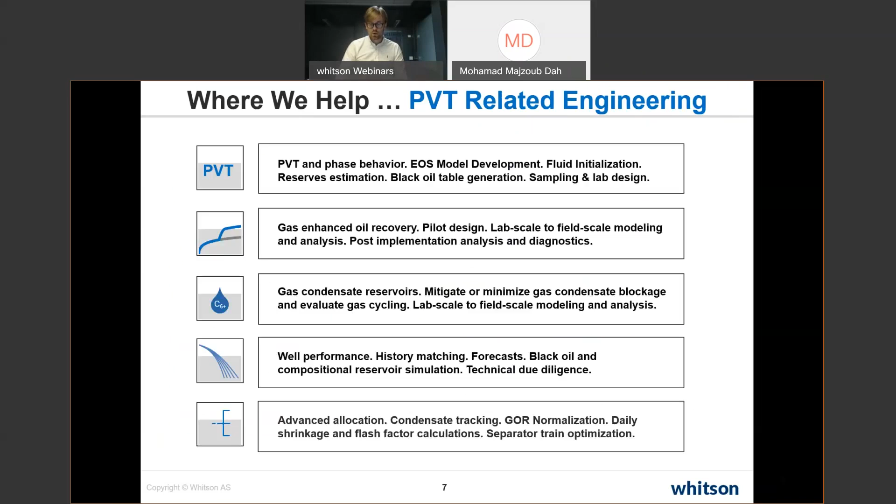So very quick on Whitson. We've been around for more than 30 years, focusing on helping the global oil and gas industry, everybody from independents to super majors and NOCs, with PVT-related engineering. That's consulting, software, and databases, which is a little bit relevant for what we're going to talk about today. PVT-related engineering is essentially everything that has to do with PVT: PVT model development, laboratory follow-up, gas-enhanced oil recovery, gas condensate reservoirs, well performance, advanced allocation, and everything in between. We typically say that everything we work with has a significant compositional sensitive component to it.

When it comes to tight unconventionals specifically, we've been working on most of the largest basins in North America, where Duvernay is the newest one under our belt, which we finished probably a month ago, and is also the main objective of this call. We've done similar studies in Eagle Ford with multiple companies, Permian with 14 different companies, SCOOP/STACK, Bakken, and also the Montney the last few years. That's been very successful.

What we try to solve in this study is that we as engineers, geologists, petrophysicists, or marketing or sales people have a lot of PVT-related questions that we need to answer on a day-to-day basis. Sometimes PVT is the only thing that matters; sometimes PVT properties are one of several things that matter to a decision or to creating value. For example, we need black oil tables for every single well throughout our acreage. How can we get that? Or black oil PVT properties, formation volume factors, or solution GORs to calculate reserves. Bubble points and dew points have been in the media a lot the last few years. How do they vary across the field?

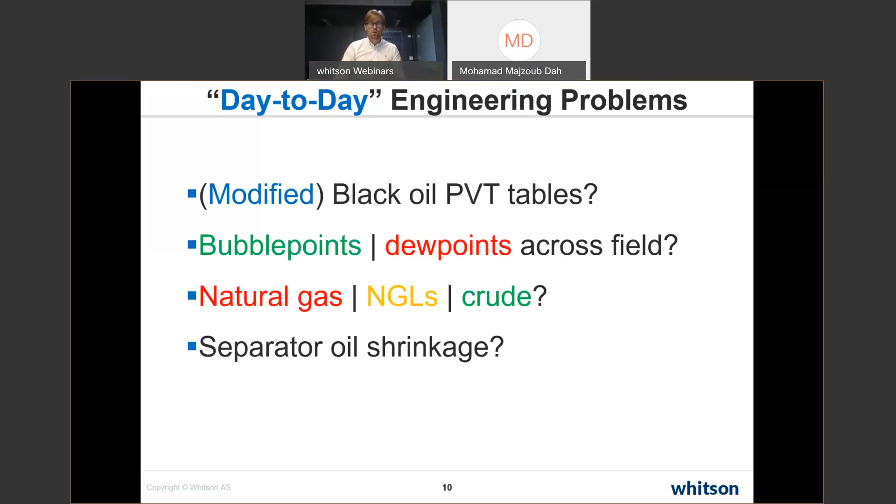When you're producing oil and gas, you're actually selling natural gas, NGLs, and crude. So how can you convert the forecasts you provide in terms of oil and gas rates into the actual products that you sell? How can you quantify separator oil shrinkage, or estimate how much uplift you'll get from gas EOR, in this case huff and puff? These are just a few of many questions where the product of this multi-client study is the workhorse that will help you answer them, and we'll get back to that later.

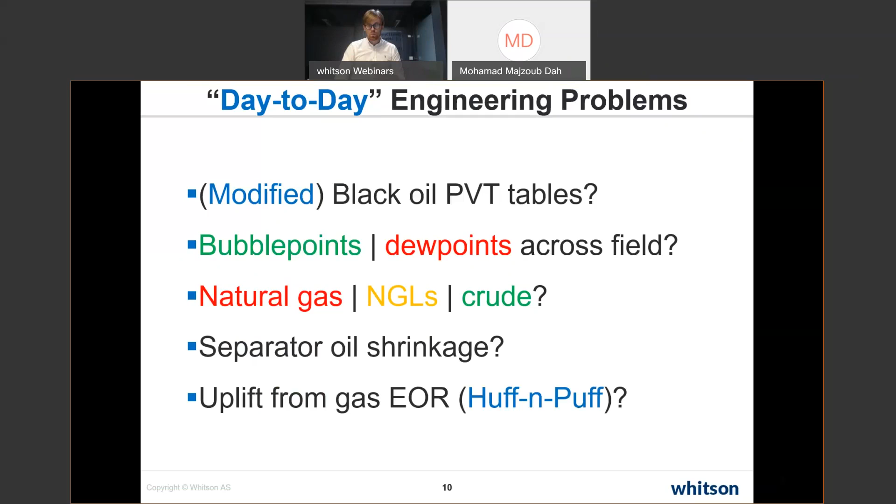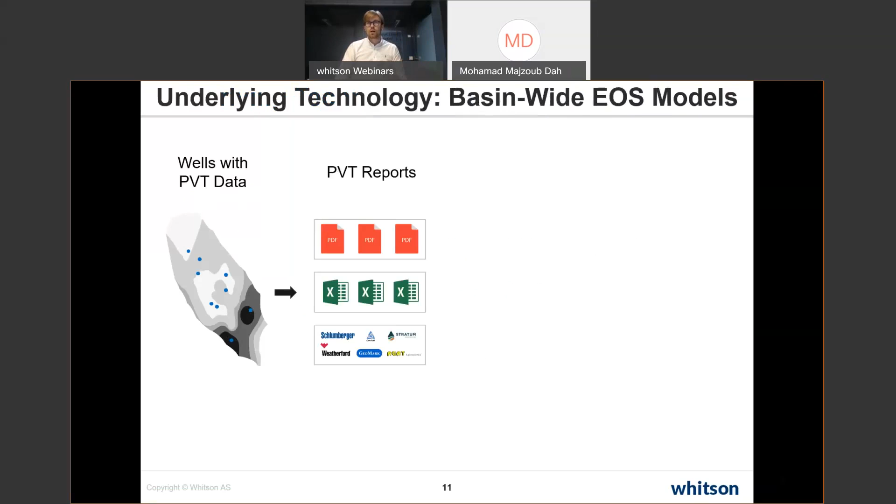The way we've conducted this study has been to gather all the wells we found in the public domain in the Duvernay, which is 23 different PVT samples from the different laboratories that have conducted these studies: Weatherford, now called Stratum, Core Labs, and one more company, I think. Then we've used all that data to create one field-wide equation of state model, and we'll talk about what that really is and what it can be used for. The key point is that we can use this one model for all the wells across our basin, and we'll explain the details of that in a minute.

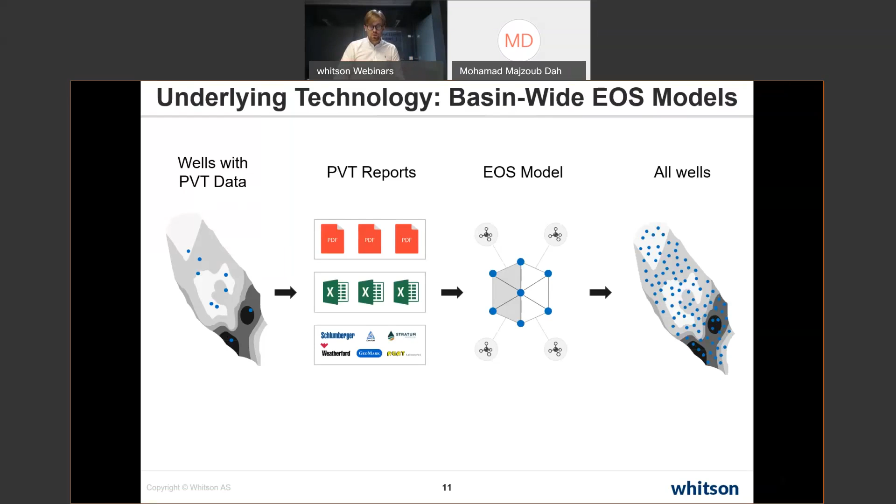The alternative to this, and there are alternatives to having a field-wide equation of state, but here's essentially a couple of the key things that are typically flawed with them. So the first thing would be just regular PVT correlations, for instance, the Standing correlation or the Glaso correlation or something similar to that. However, technically, they're only yielding reasonable results for solution GORs less than 1,000 scf per barrel.

And especially when we talk about these unconventional systems, probably if we just exclude the Bakken, they span a wide range of fluids. They span what's called the critical transition, so both near critical gas condensates, near critical volatile oils, and gas condensates, where a lot of these correlations fall short in their predictive capabilities.

Another opportunity would be just to create a so-called regular equation of state, which typically is just tuned to one sample or very few samples in a particular basin. And what you typically see there is that they're not capturing the field-wide characteristics, which is, as we'll talk about a little bit later, the relative paraffinicity or aromaticity of that particular field.

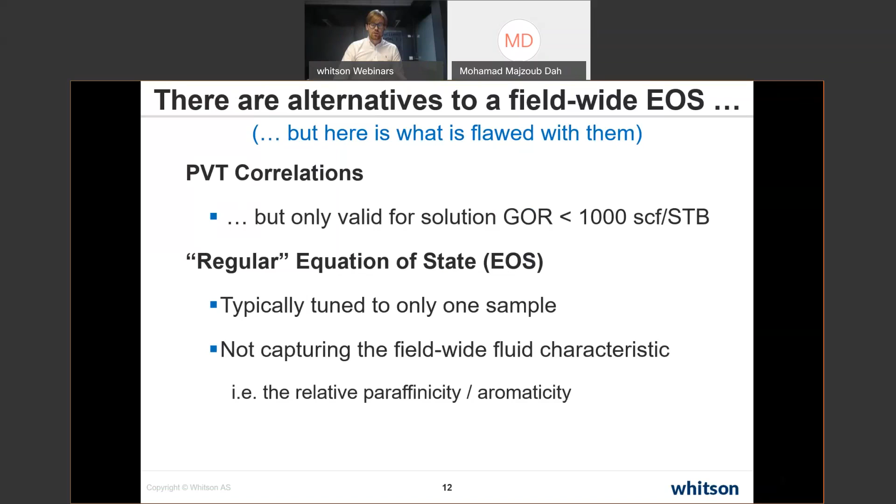And that's really, really important, and essentially what we will also show later for this particular basin and a lot of the other basins as well, where a lot of these fluid systems, especially in unconventionals, have a very, very consistent trend when it comes to this so-called relative paraffinicity or aromaticity.

But before we go into that, the first thing is to answer, okay, a field-wide equation of state model, what is it really? In short, it's a model that requires 3 input parameters, so pressure and temperature that we know very well from day-to-day work, being in the kitchen. You know that water boils at 100 degrees C. You know that you might have a pressure cooker in the kitchen as well.

And with those 2 inputs and this thing that we probably don't have that much of a hands-on relationship to, which is the composition, which is just what differentiates a dry gas from a black oil to a gas condensate. With these 3 inputs, you can then predict the phase and volumetric behavior for a particular fluid. Okay, and so the equation of state for the entire field is kept constant, while what is changing is the temperatures and pressures and the composition from one area to another.

And just to take an example, a dry gas would have much more methane content and no C7 plus content, while a black oil, for instance, would have a much lower, on a relative basis, C1 content and more than 25 mole percent C7 plus, for instance.

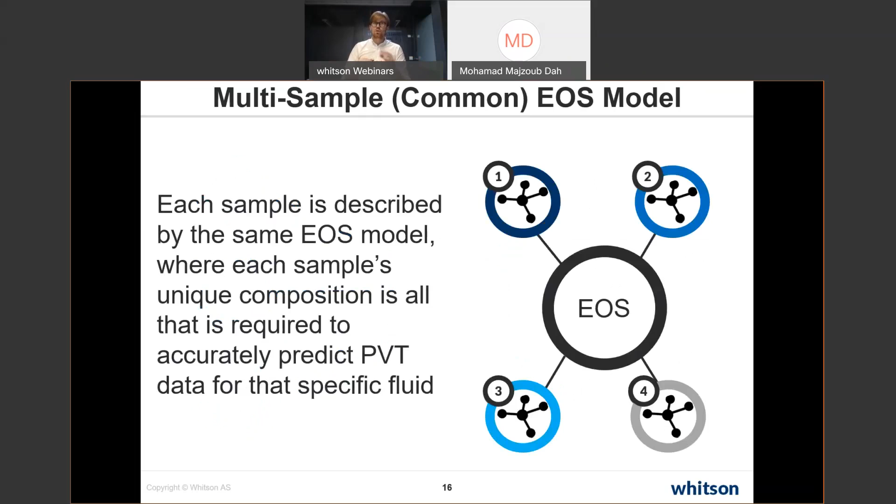And that's what we call a multi-sample or a common or a so-called field-wide equation of state, where several compositions are used in the same model, and the results for a black oil, a near critical gas condensate, and a volatile oil, as you see to the right here, are predicted with only one model. And the strict definition of this is that each sample is described by the same equation of state, where each sample's unique composition is all that's required to accurately predict PVT data for that specific fluid.

And then the question is, what is actually different from one basin to another? And that's essentially what I talked about in the introduction, this relative paraffinicity and aromaticity. And what does that really mean? That means how we actually characterize these heavier components, typically heavier than C7 plus, because they are, for practical purposes, just averages actually of all the isomers that exist

And to make this a little bit less abstract and a little bit more concrete, if I asked you, send me an equation of state model, then you would typically send me a file or an Excel sheet or something similar where you have two tables, one being the so-called component properties, and the second being the so-called binary interaction parameters. And they are representing two of the industry standard equations, which are typically Peng-Robinson and SRK, so-called cubic equations of state, that you can use in any of the industry standard commercial tools as of today.

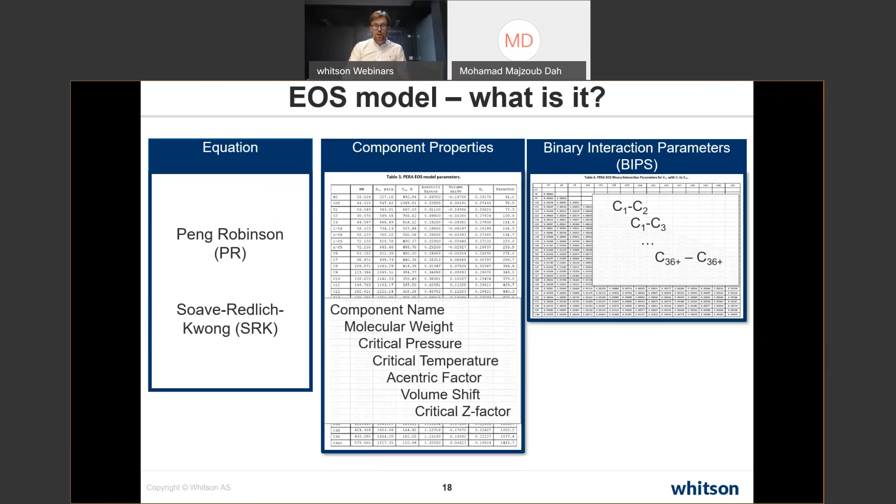And yet again, this equation of state is the cornerstone to so many different engineering applications. And sometimes you are not using the equation of state directly, but you're using derivatives of the equation of state, for instance, black oil tables. And most black oil tables today that you use commercially are actually generated from an equation of state, but what you're using as a direct input in the simulation is a black oil table that's kind of like a child or a derived product of that model, which will be specific from one composition to another.

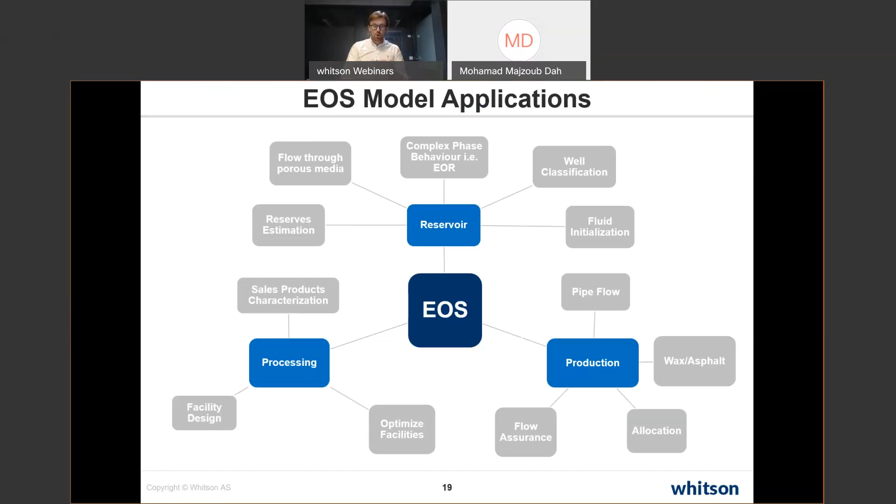So jumping back into the Duvernay fieldwide EOS study, which is what this call is about, we have made a so-called fieldwide PVT model that everybody that participates in the project gets immediate access to. And that's tuned to 23 different PVT reports, so a considerable amount of data, all the data that we found in the public domain.

The raw data itself we share as a part of the JIP, so you get the data, you get the equation of state, and since the work is already done, you get the results immediately, which means that essentially you could start to use these things tomorrow, in theory.

The available data that we have is 10 reservoir oils and 13 reservoir gases. So we have 10 bubble point samples and 13 dew point samples. And this is the experimental overview, where we have 23 CCE tests, 13 CVD tests, 10 DLE tests, 9 multi-stage tests, and also a lot of reservoir oil viscosities.

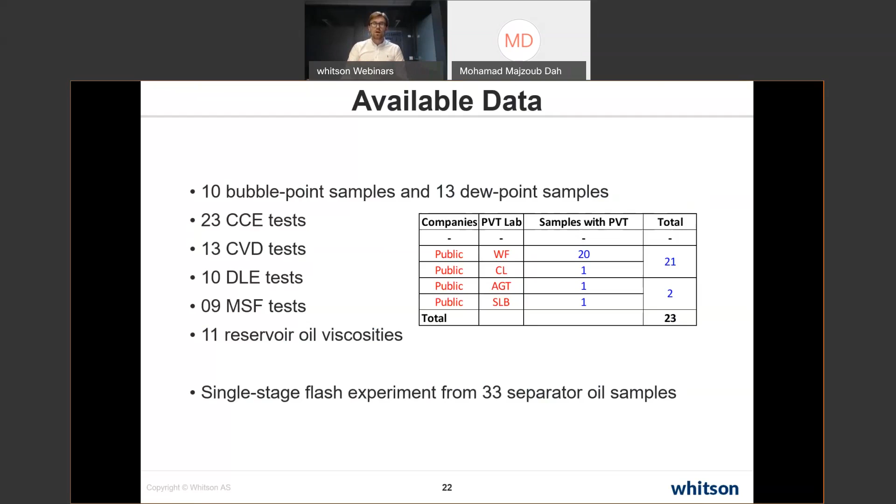For those of you who are in the domain, it's very rare to actually have measured reservoir oil viscosities. Most of the samples are from Weatherford. There is also one from Core Lab, one from AGAT, and one from Schlumberger. And in addition, there are around 33 single-stage flash experiments conducted on 33 separator oils, which is a key point in, for instance, estimating flash factors and shrinkage factors for individual wells and how they change throughout time.

The most important thing, and I iterate that over and over again, when you're developing a field-wide equation of state is to actually have a wide range of different fluid samples. And we can definitely see that in this data set. We have GORs all the way from 500 scf per separator barrel up to 50,000, I think. The same goes for the saturation pressures. They're monotonically increasing until some maximum before it decreases at higher GORs. This is what you see in the classical PVT textbooks from, for instance, Standing.

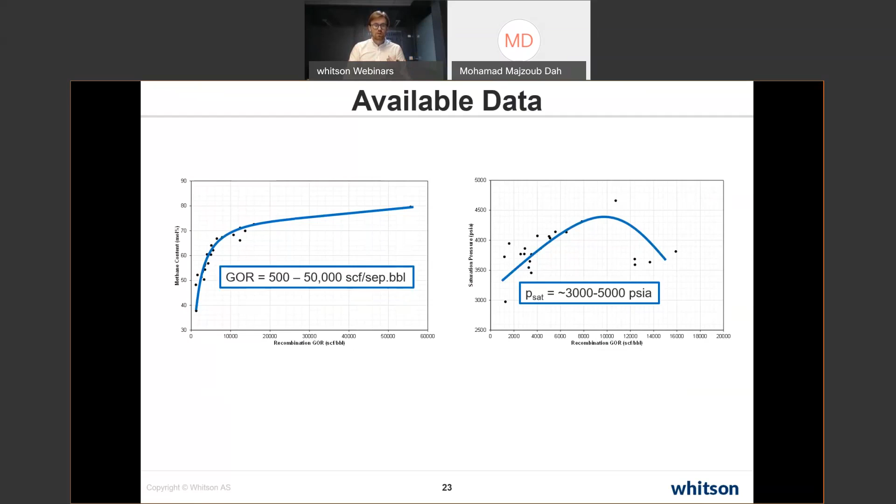This is a very good basis and a very good starting point to create these field-wide equations of state, because you capture not only the simple phase behavior stuff, but you are also covering a lot of the near critical, rich gas condensate and volatile oil PVT and phase behavior that represents what we call complex PVT and associated phase behavior data.

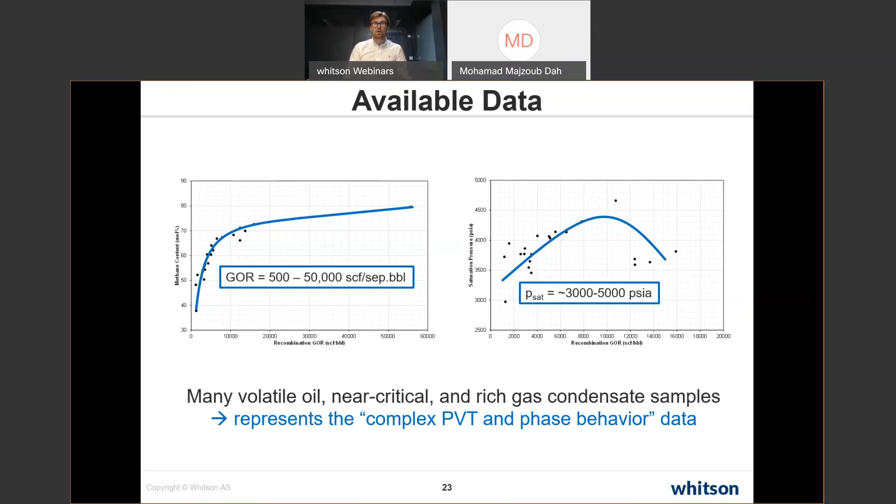So that's very good. And you see that this range right here, where we have most of the data, is actually in the region that represents the most complex phase behavior there is, which is what's called near critical fluids. And if you're able to predict that accurately with an equation of state model, you have a very robust equation of state, because that's not trivial. And it is also a very good starting point if you are going to model gas injection processes as well.

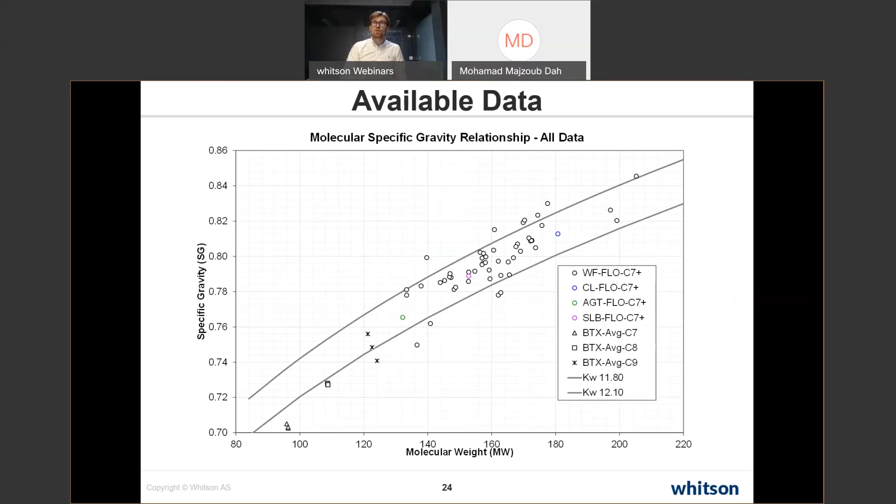And when you have this basis as a part of your data set, you have at least a very good starting point to be able to create a so-called field-wide equation of state, which we proved yet again here was possible to develop, and this equation of state also predicts a wide variety of fluids at different conditions. And we can see that one of the requirements, this consistent field-wide aromaticity and paraffinicity relationship, was developed for this particular field.

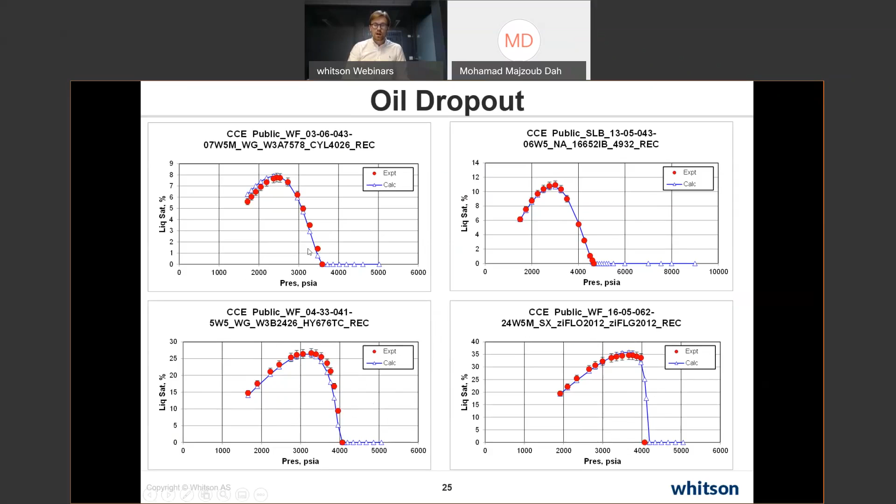In terms of the predictions, here you see a few examples of some very near critical gas condensates. Down here, if you see my cursor, these are fairly near critical, almost a vertical liquid dropout curve right here. While this is something a little bit leaner, as you see based on the liquid saturations, but very good matches on that, which is a very complex phase behavior when it becomes near critical.

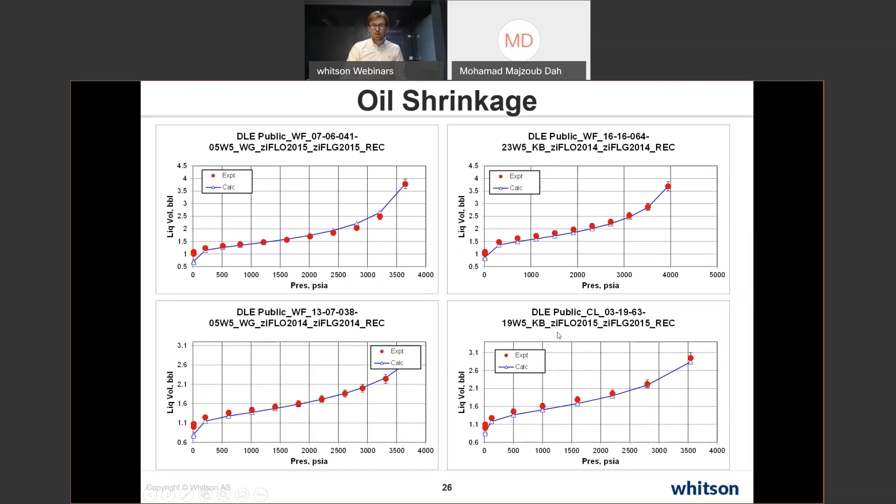We see the same on the other side of the critical point when we're working with oils and oil shrinkage; a similar trend can be observed, with very good predictive results. The same also goes for the compositions, representing the K values, which is also an important piece to capture across the field.

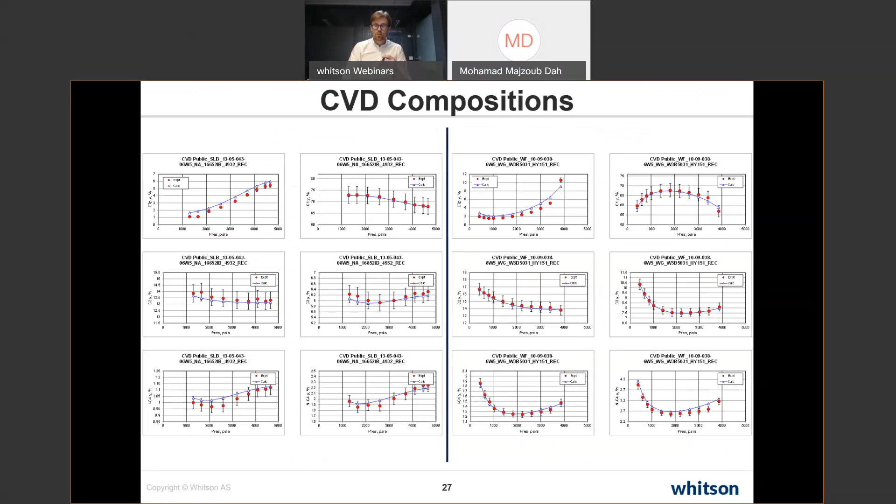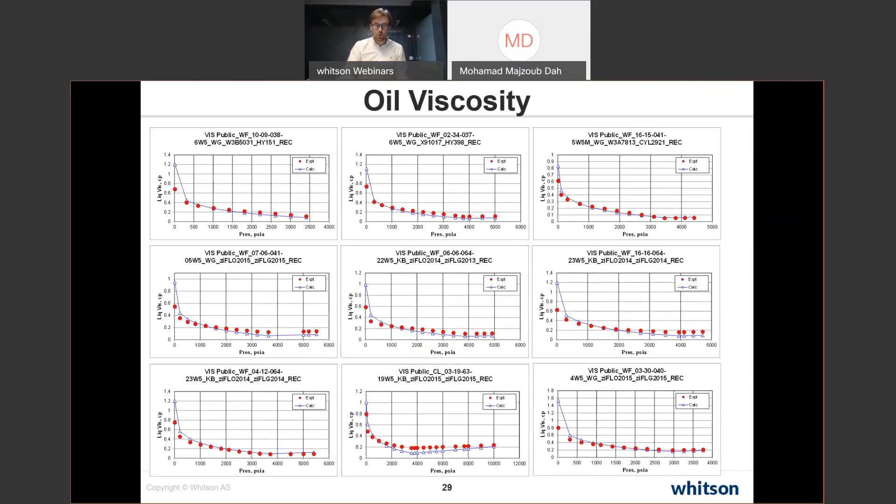And not to mention also the oil viscosities, which is actually probably both the most uncertain thing that you measure in the laboratory, and also probably one of the hardest things to accurately model with an equation of state. And we use the so-called LBC model for that, which is also a part of the deliverables.

So the question that many people have is like, okay, if we participate in this study, great. We actually get the field-wide equation of state model. We get a report. And we get all the PVT reports that the model was built upon. But how can I actually use this in my day-to-day work?

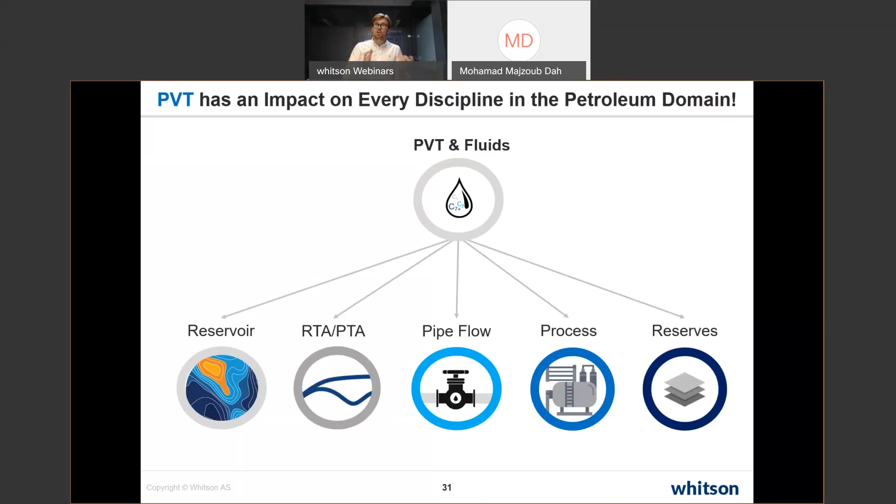And for all of you that have been working in the industry for a long time, you know that PVT is one of the few things that actually has an impact on essentially every discipline in the petroleum domain, whether you do reservoir, RTA or PTA analysis, pipe flow, process, or reserves. Or actually it could be seismic and drilling simulation and whatnot. It actually has an impact, sometimes to a lesser degree, and sometimes to a more significant degree.

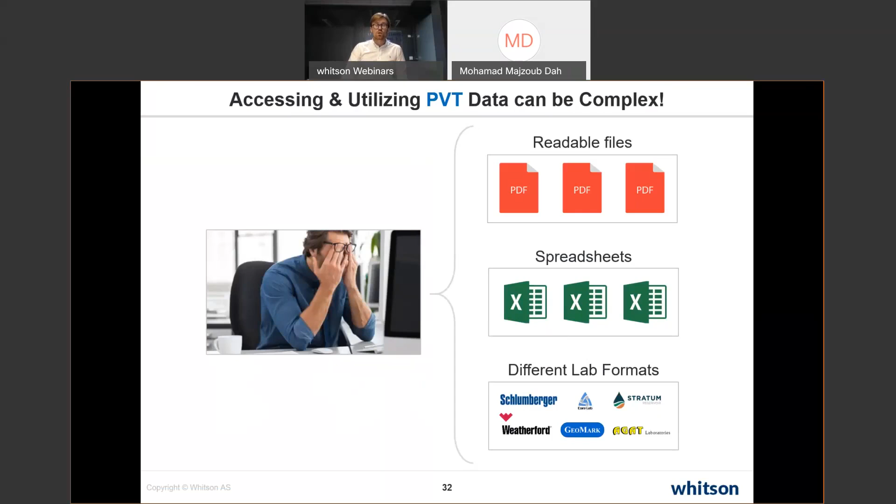You can use these results immediately. And we like to think about our software, which is called Whitson PVT, as a living document for all PVT data and models inside of a company, which means that everybody in this company has unlimited access to the solution. It's web-based, so you would simply go to the name of your company.com, log in with your simple Outlook information, and you have access to all these results. And when we get new information, these results will be updated dynamically.

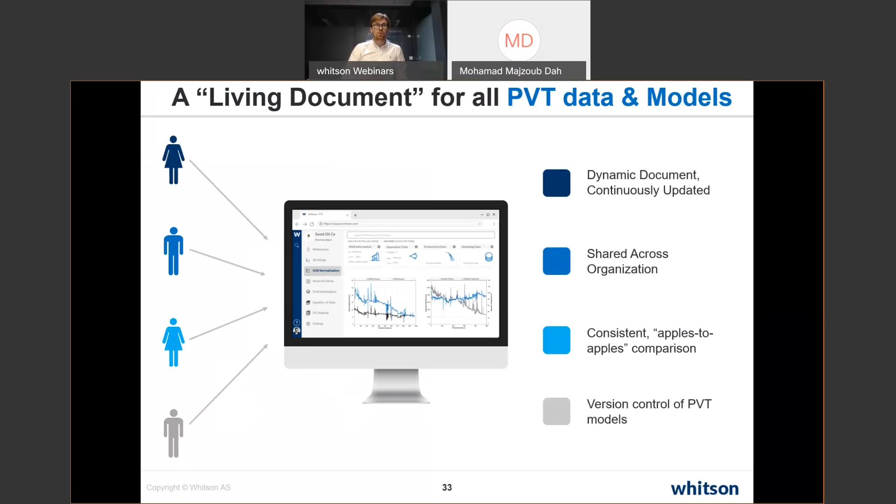It's shared across the organization, which allows for a consistent apples to apples comparison. And it also allows for version control of the models that you use in your analysis. And important for us to emphasize here that this is not a tool that's very complex. I'll show it in just a minute, but it's designed for all users in their day-to-day work, and that can be everything from just accessing formation volume factors on a particular well, or to generate a black oil table for a particular well. So it's designed for all users in day-to-day work, and not for in-depth studies and advanced users.

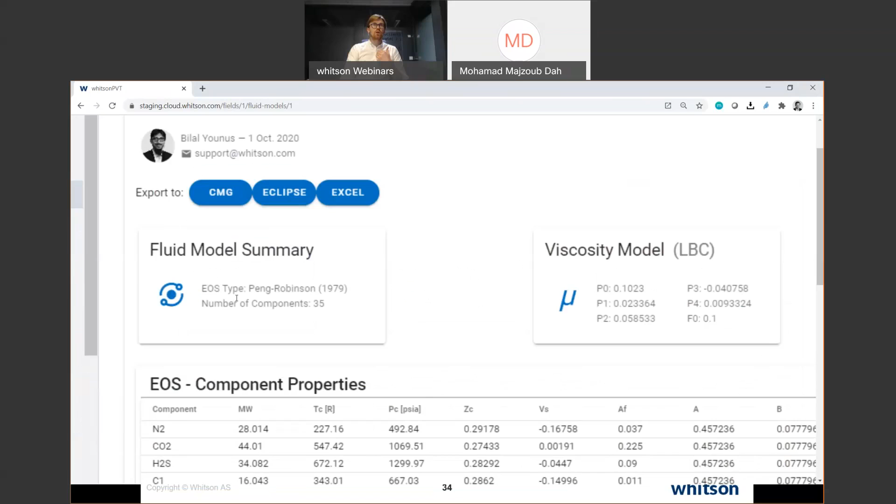And this allows for a consistent place to store this type of data. You know that this data was used to create this particular model right here, and it was created by Bilal, and you can export it into all the different formats that you can think of. And it's a so-called Peng-Robinson equation of state with 35 components, with the associated LBC and gamma model, as you see right here. And probably most importantly, this is not like a SharePoint folder where you have a file.

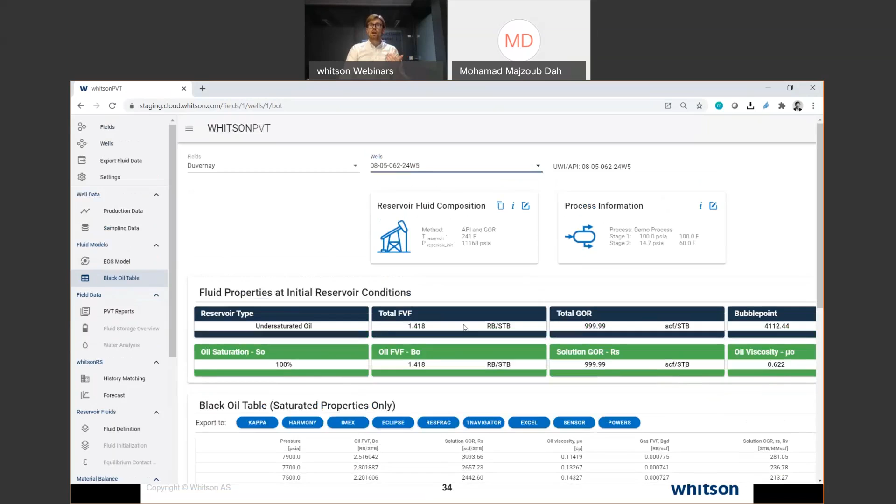This is actually hooked up to a thermodynamic engine, such that you can actually start to run calculations on a well-to-well basis. So if you, for instance, would like to create a black oil table for your particular well, you can do that on every single well. You can also get the formation volume factors and GORs, and you can export it into all the formats that really matter: Kappa, Harmony, IMEX, Eclipse, ResFrac, tNavigator, and so forth.

The only thing that's really required to create a table like this, which is actually a fairly time-consuming thing, depends on the data that you have available. Everything is now delivered into this system, and you can create a fluid based on different methods. The simplest one being just that you have API and GOR and the reservoir conditions. With this limited input, what is happening behind the scenes is that we're finding a composition that has actually been measured in the field.

Then we recombine this composition to replicate this data at the 1000 GOR, and also modify the molecular weight of the C7+ component to exactly match the input API. So we have two input parameters, and we have two regression parameters, which are just a recombination GOR and this molecular weight of C7+, and we're able to recreate exactly this input data right here.

If you want to be fancy, a lot of the companies in Canada also have separator compositions up to C7+ that will yield better results, and you also have this type of data for every single well. Or if you have a PVT report for a particular well, you can input the composition from that report directly into the system.

Key takeaway is that no matter what method you're using, you can generate the black oil table dynamically on the go for every single well with this limited information, and you can also get the associated reservoir properties as well in this basic module. So with that, I just wanted to communicate that these things can in theory be utilized already tomorrow, where you can provide or obtain value-adding analysis from day one.

The last thing to mention, there are a few things about participation logistics. There are three different deliverables. The first one being the field-wide equation of state model itself. There is also a detailed report, and of course all the different PVT reports that were used in the study.